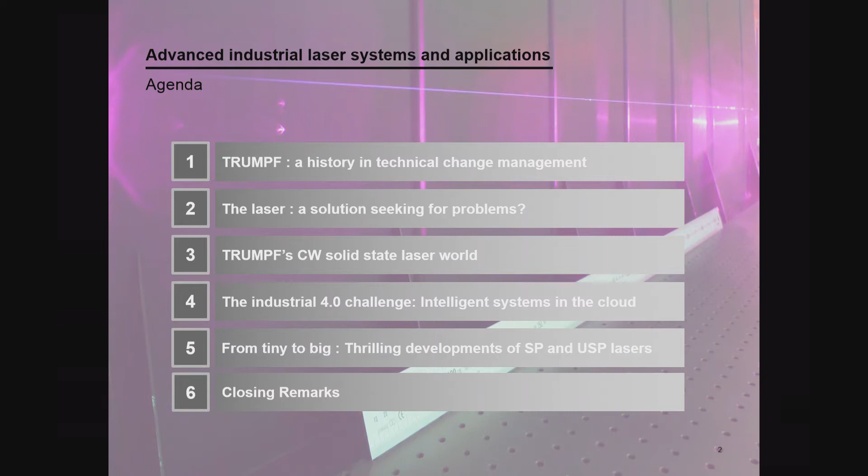As already said, I'm going to talk about advanced industrial laser systems and applications, mainly from the viewpoint of TRUMPF. I structured my talk as follows: I'll give a little history and some actuals on TRUMPF, then talk about applications in industry starting with CW related applications, making a step towards solid state CW lasers. We'll then talk about our challenge of mastering industrial 4.0 and the expectations our customers have of us and our answers to that. In the last part, I'll talk about short pulse and ultra short pulse lasers - though our ultra short pulse lasers are never as short pulsed as Urzi's lasers, so bear with me - and then I'll close with some remarks.

TRUMPF is clearly, as you know, a private family owned business. The company was founded in 1923. It more or less came out of a machine shop and then evolved slowly into one of the biggest privately owned machine tool companies in the world.

It's today split into mainly two divisions: a machine tool business and a laser business. The laser business takes revenue-wise around 30% today, and we are spread over 73 subsidiaries worldwide.

One thing that is driving this company and always fascinated me, even before I joined TRUMPF, is this continuous drive to new innovations. That has poisoned the company, I think, since its beginning, mainly also driven through Berthold Leibinger. I thought I'd sneak in some financial data here, presented on a log scale - you see the revenue development from the TRUMPF organization since 1949.

Obviously it's easier to grow your company on a log scale - it's still in the millions and in the billions. TRUMPF has put a lot of effort into growing their organization over the decades with new technologies. Surprisingly, already in 1979, TRUMPF introduced a system that was a punching machine together with a laser cutting head, by that time with 500 watts.

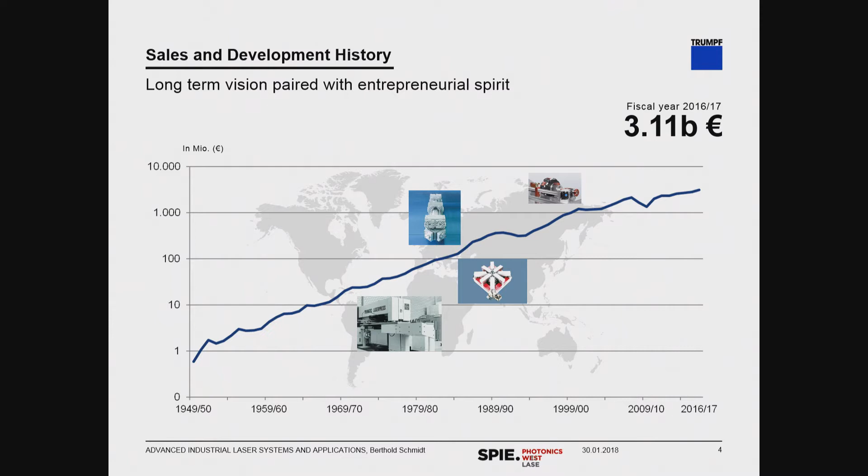Now today, TRUMPF is naturally investing heavily. I think Peter Leibinger mentioned this morning we're investing around $400 million in R&D every year, or at least last year, into new technologies such as fiber laser activities, additive manufacturing, as you saw in the introduction, and also AXOOM, a software-based system organization supporting the industrial 4.0 activity of our customers, and also the EUV business.

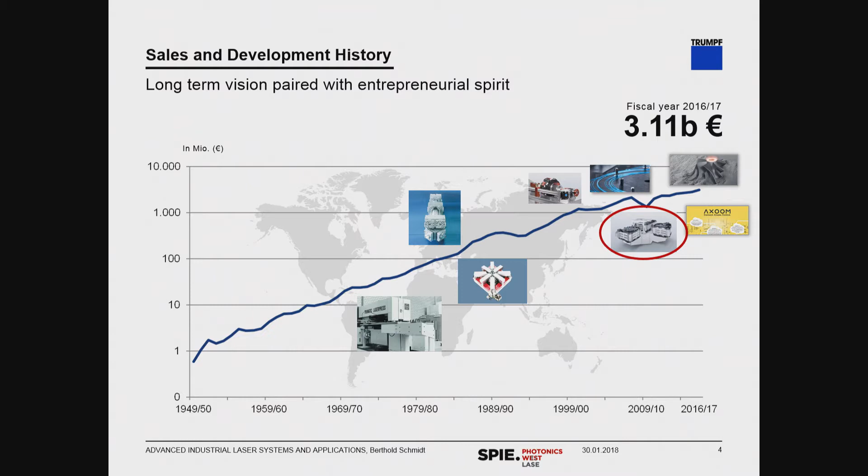I think the EUV activity is a good starting point for my talk, because it gives another nice example of the entrepreneurial spirit of the TRUMPF organization. This activity was started 10 to 12 years ago, mainly inspired by Peter Leibinger, who supported it very heavily. The idea is to use a CO2-powered lithography system to generate the next generation of microchips with node sizes below the 7 to 9 nanometers we have today.

This is done in a fairly simple way - I'll skip the difficult equations. You use a CO2 laser. You hit a tin droplet in a chamber with the CO2 laser. When you hit it precisely and strong enough, it creates a plasma, and the plasma then, during the recombination process, emits light in the range of EUV 13.5 nanometers. You use the CO2 laser because the absorption coefficient in the plasma is proportional to lambda squared, so longer wavelengths actually help here.

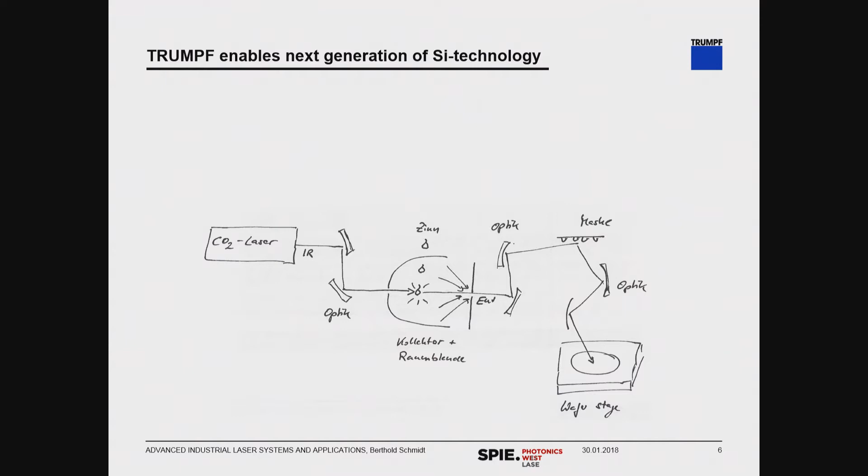You guide your EUV light through a set of optics and masks onto your semiconductor wafer. Naturally, the whole thing is a little more complex than shown here. The droplet generator that is used is already a technical challenge, creating 50,000 droplets per second, so we have to hit each droplet with a frequency of 50 kilohertz.

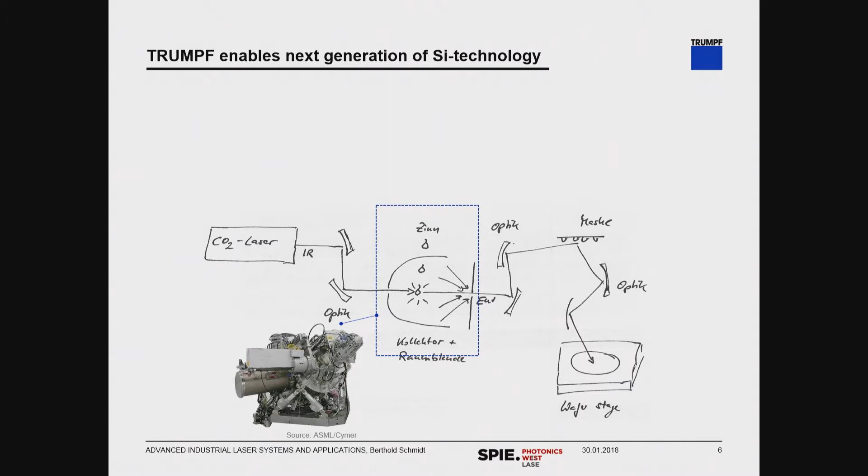Actually, we have to hit it twice: first there's a pre-pulse that creates a small mist of particles, and then a second pulse from our laser - which already has the size of a house - actually a diffraction-limited laser, creates this plasma. The lithography system, which normally stays in these fabs on top while our lasers are in the basement, has roughly the same size, guiding the EUV light onto the mask.

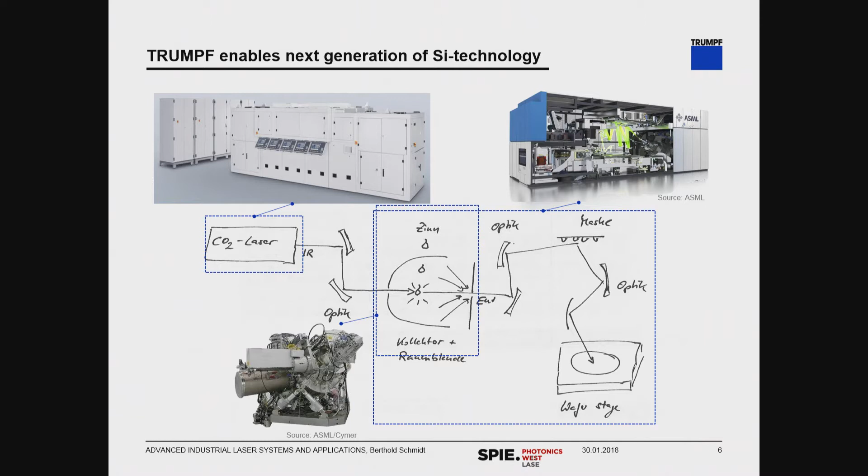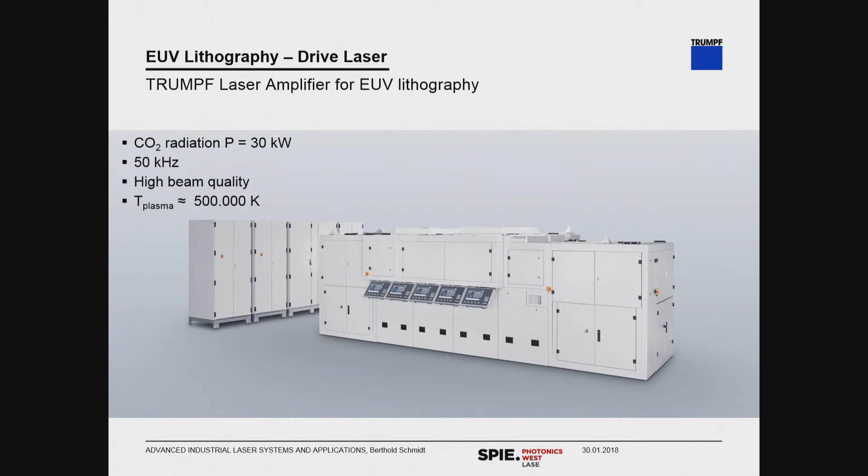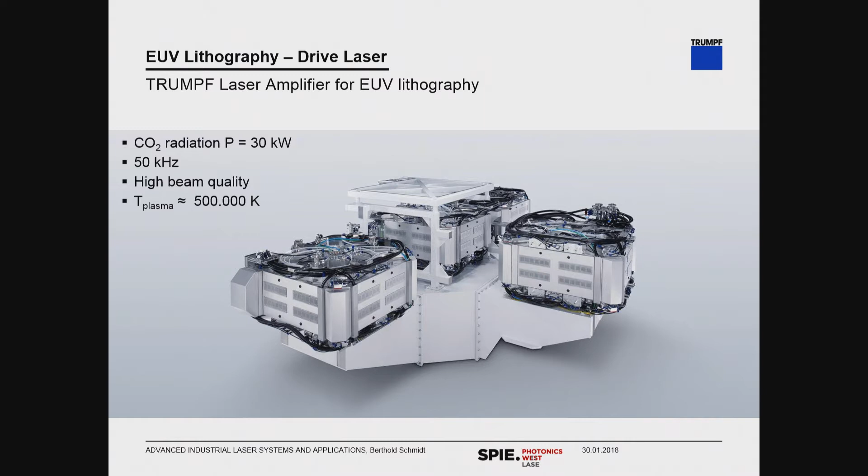Looking at the laser in more detail, it's a 30 kilowatt laser. It's a MOPA system, master oscillator power amplifier. We are creating a plasma temperature of around 500,000 degrees Kelvin. This is the 4-stage MOPA laser architecture. I think it's a very nice example of how, from a fundamental idea with continuous investment and growing with your partners, we evolved this from early stage development into a real product over the years.

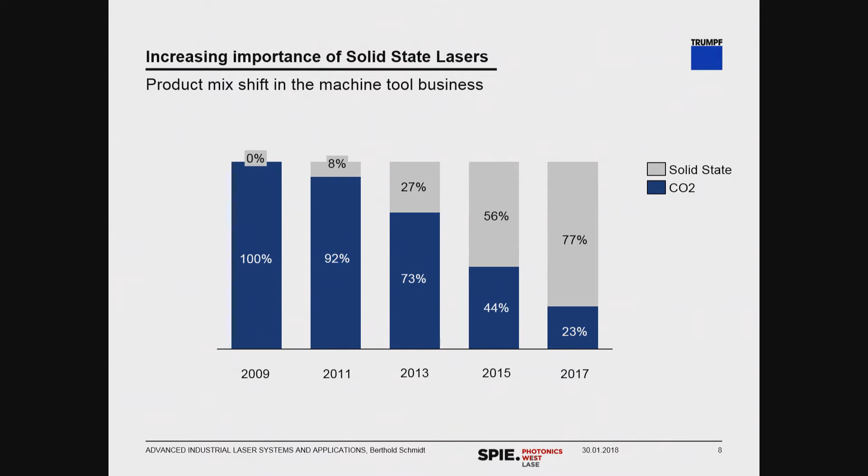Solid-state lasers for cutting at 1 micron naturally have the advantage that they are less sensitive to plasma absorption in welding, for instance. That's why they easily go through the plasma plume that normally sits above a metal workpiece. Therefore, CO2 lasers are great for EUV plasma generation, and solid-state lasers are better for welding and cutting purposes.

We approach this change with a whole bandwidth of technologies, shown here with our international entities. CO2 lasers are still manufactured very successfully in Ditzingen. Schramberg is doing the disc laser activities in Germany. We have a marking laser activity. The diodes and pumps are produced in Princeton Photonics - that's the area I'm active in right now.

We are supplying SPI in Southampton, which together with JK Laser we acquired. Then there is this group in TRUMPF Scientific in Munich, and then there is our Ingeneric group that provides us the micro-optics for that. We are more or less supplying out of our entity most of those activities.

And then there is still a little space - you might have heard that we just acquired another company in Aachen, Amphos, to complete our technology portfolio. You see, we're not picky on just one system, and I think that's a great acquisition, because on that we will have additional synergies for future laser systems.

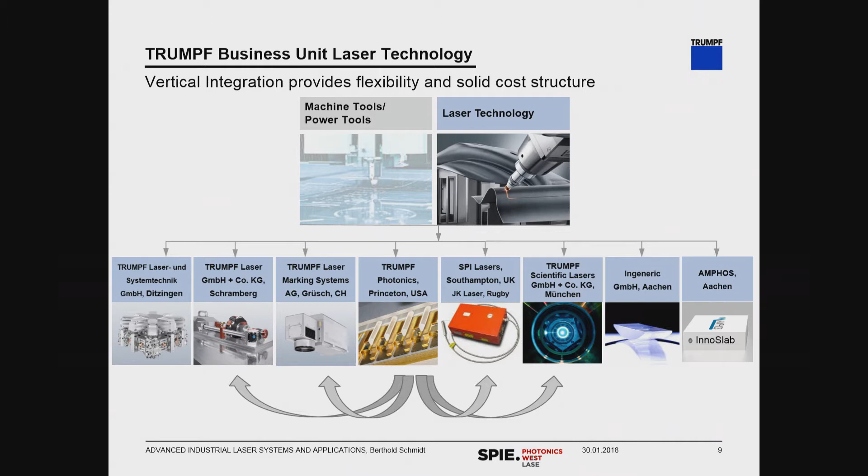So one slide on diodes. As you know, in Princeton we are continuing this vertical integration activity to be successful. We have various building blocks - here the pump system for our disc lasers, where the bar power went up over the years to 180 watts, and now in the latest disk laser architecture to more than 200 watts on the operation level.

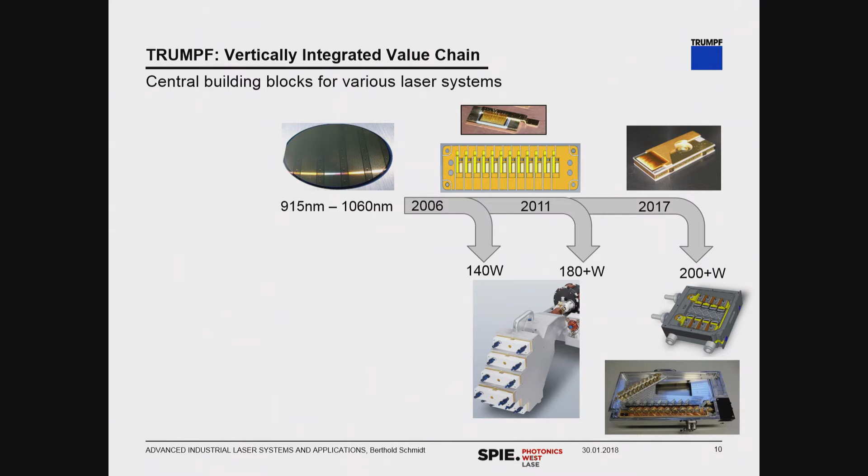We are using an isolated elastic cooler for those bars, and this is also a very handy tool because the same lasers, the same concept, we use for our research activities on the dense wavelength multiplex systems shown below. The same production line is also producing in higher and higher volumes single emitter and fiber pump modules. That's a 14 emitter module with 140 watt output power. It's already an industrial standard, and we supply this to our entities - SPI naturally, but also for marking laser activities and some short pulse fiber laser activities in Schramberg.

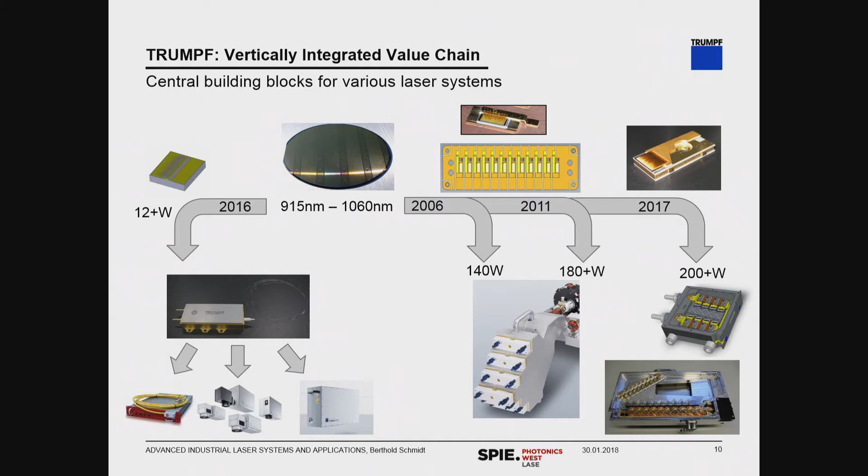Now, talking about applications on the laser side, I'll stick a little with the CW applications. Our customers expect that our system has very high flexibility. So with the same machine, we are able to cut this small bicycle with feature sizes in the micron and millimeter range. We are also cutting thick steel plates, and that's what our customers expect, because smaller companies have a whole variety of orders and challenges.

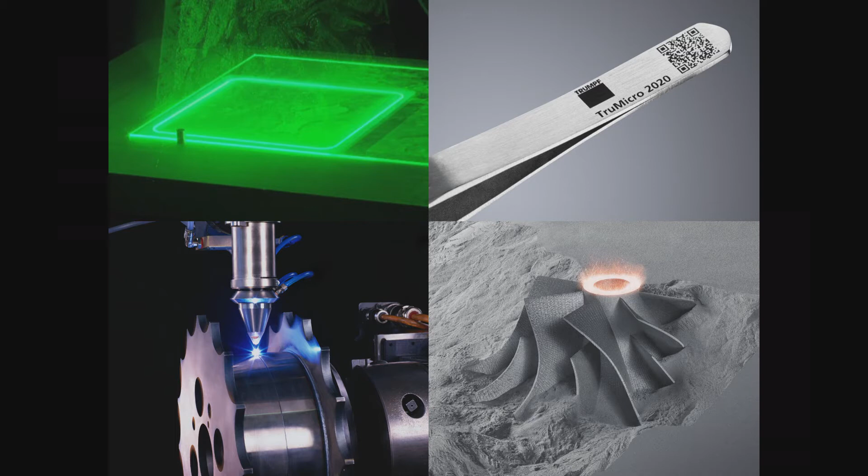Other applications we have include cutting of transparent material, marking, and laser additive manufacturing on one side - laser deposition, and laser melting out of a powder bed.

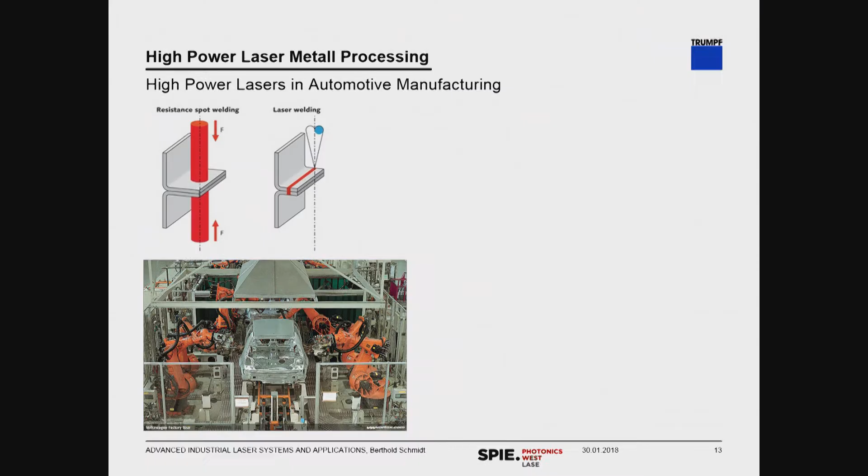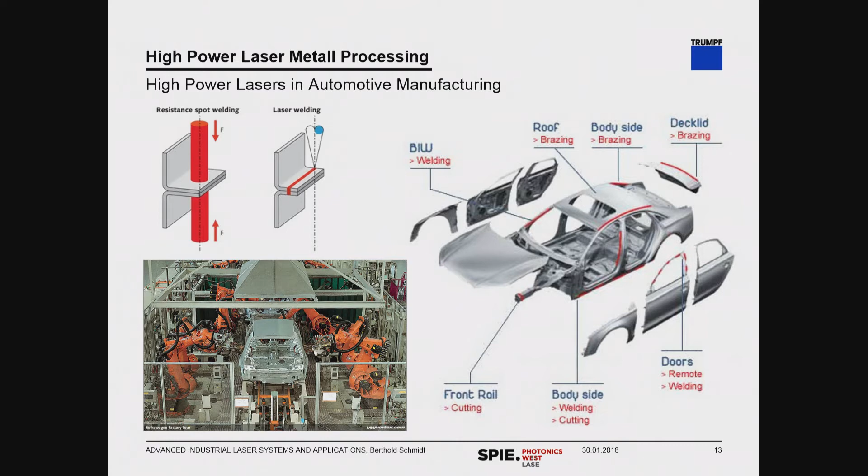When you start using a laser in your production line, you naturally also need to precisely cut in your other laser areas. So suddenly, it's like a domino effect - you start introducing lasers in multiple production steps, and therefore we saw an enormous increase in welding and cutting lasers during the past years in the industry.

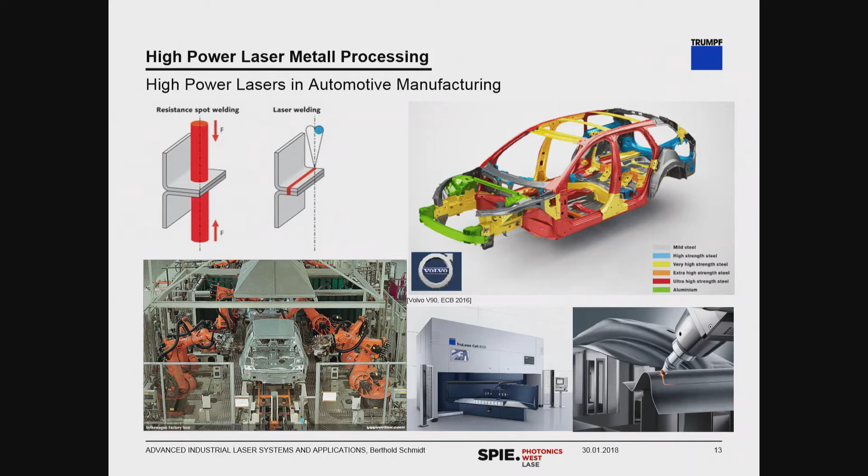When we span the use or utilization of lasers in a matrix, I think you have seen this in various forms already, so I won't stay here too long. The markets we have are remote welding and cutting - this is the biggest and most dominant market. There are other applications at lower brightness levels with a BPP that are still sufficient for conventional laser welding, but also for brazing and surface application.

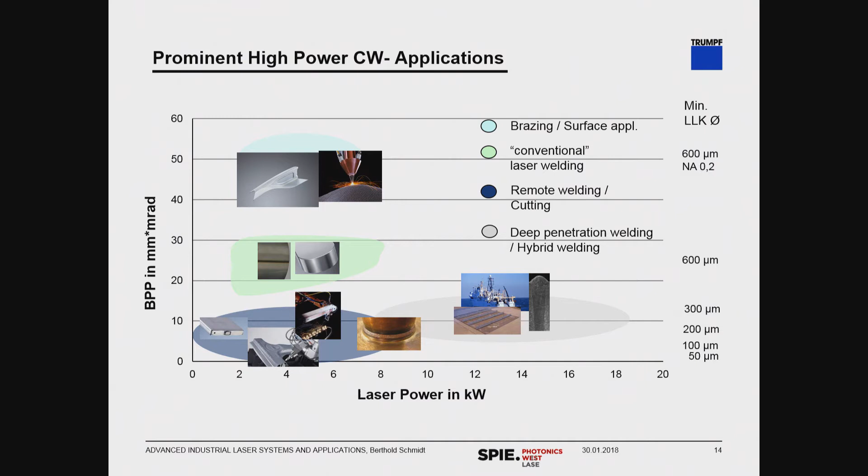With lasers beyond 12, 14, 16 kilowatt, you can do applications like deep penetration welding and hybrid welding.

To satisfy these expectations from our customers, we have a whole variety of different products we utilize for those purposes. Fundamentally, the technology is based on the platforms shown here, while the rod laser is not used anymore due to its disadvantage of having the heat profile and cooling and pumping in the same range, and therefore the heating up makes it not prominent anymore for high power laser systems.

Being a diode person, I know that improving a laser diode or its power level, you normally reduce the confinement factor, bring the internal losses down, and enlarge the footprint of the laser device to have better cooling.

You can do the same thing with a fiber laser and a disc laser - reduce doping concentration, enlarge mode size and diameter, and for fiber, for instance, just enlarge the length of the active fiber. On the disc laser, you're enlarging the ratio of surface to volume. That's why we use a thin disc laser.

I like the disc laser in particular as a diode person because it can be pumped with low brightness laser diodes, just in the range of 450 milliradians. So for semiconductor laser diodes, it's really like a flash lamp, and it's a great brightness converter, as you will see in a minute.

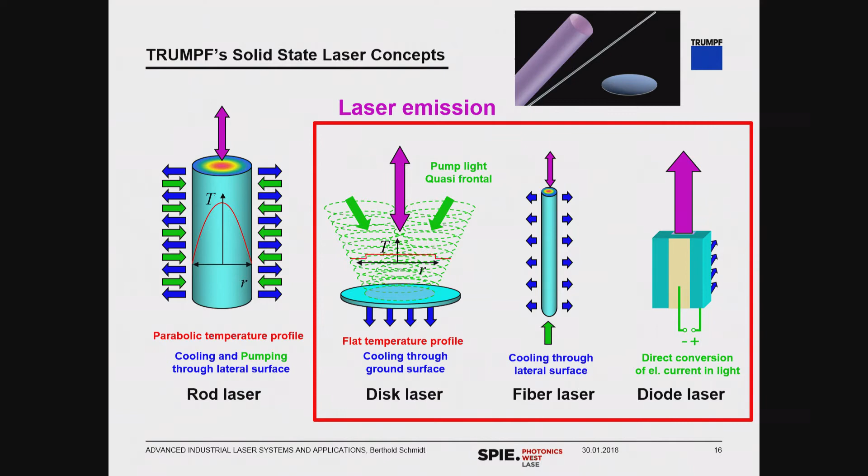So those are the technologies we are more or less selling to the market, and here's the matrix that fits the matrix you've seen before. Is there a better pointer? No, okay, it's not much brighter.

So the fiber laser activities you see here - we have today standard products up to 1 kilowatt high brightness. Then the disc lasers, these are coupled into 100 micron, going up to 12 kilowatt. These are folded disc lasers, so there are 2 disc lasers in the resonator.

Thank you, you're fantastic.

Then we have even higher power disc lasers. And here you see our conventional direct diode laser systems that range from brightness levels of 30 to 50 milliradians. And naturally, there is an activity going towards bringing those down.

But first, let us look at the single mode or single disc achievements we have already published. There was a very interesting paper 2 years ago from our team in Schramberg that showed an almost single mode disc at 4 kilowatt that was pumped with 969 nanometer into the zero phonon line.

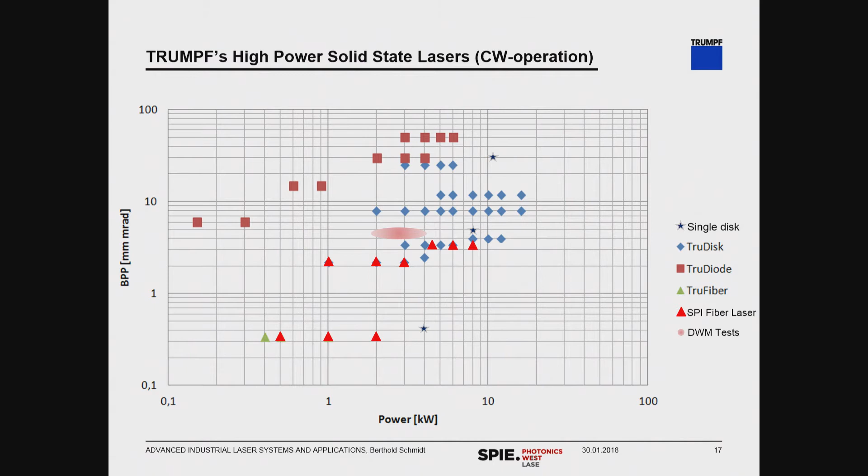We are showcasing there a 2 kilowatt dense wavelength multiplex laser. Those lasers are normally coupled into fibers of 150 to 200 micron. It's still in the engineering phase, but I'm very positive that will be an interesting add-on to support the laser portfolio we are already cultivating.

Disc lasers, I want to stick with that a little because in particular they're important for our short pulse activities. They have this beautiful property that they have these thin discs glued on a diamond, and therefore we have this uniaxial heat flow giving us very low thermal lensing for high brightness, even at very high output power levels.

I already mentioned the low brightness constraints of the laser diodes. The laser operates at very high gain saturation. So when you have a CW laser at 6 kilowatt, the output coupler has a reflectivity of 97% in that range, which means there are 194 kilowatts stored in the cavity. This makes the disc laser very insensitive to back reflections, thus being a very robust industrial laser for cutting all types of steel and materials.

And the negligible nonlinearities are in particular helpful for achieving very high peak powers, as you will see in just a few minutes.

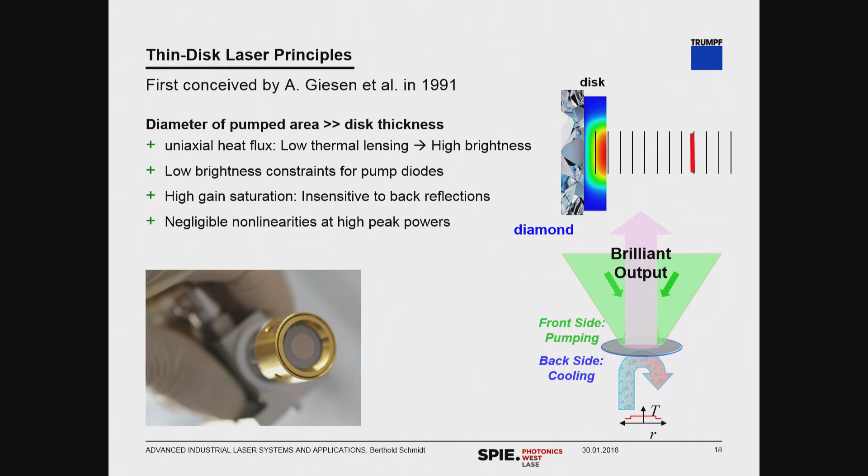So this is our last generation of disc laser we are now bringing to the market. The team has enormously improved the system. We are achieving now an optical to optical efficiency in the range of 71%. You see here the result with around 11 kilowatts out of a disc. This laser allows us also to achieve disc laser systems that almost reach 40% in wall plug efficiency, which is, I think, a tremendous step forward for this technology.

So you see here, it's more or less the pump light, which enters here through this window, and here is the active disk. It dances around between those prisms and the parabolic mirror until it's getting fully absorbed in the disk, and then we are generating the laser beam out of the disk laser unit into the resonator.

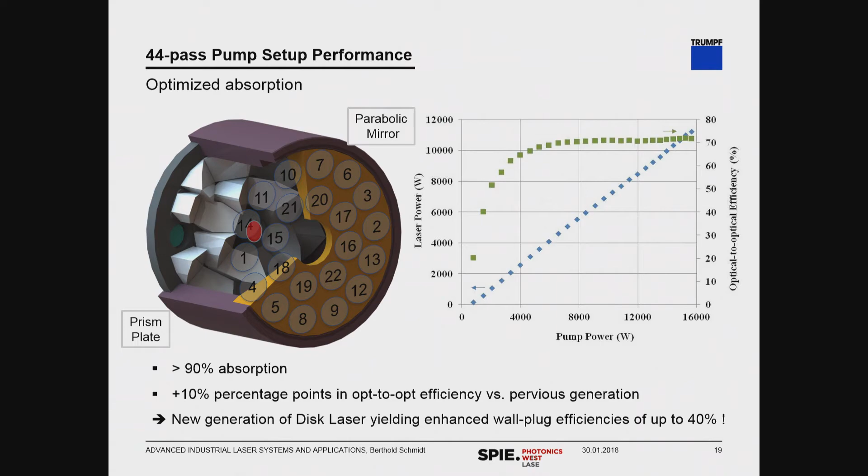In comparison to direct diode lasers, you see the footprint is fairly similar, and I use the old format, which is still our biggest volume product on the disk laser side, because you see here the pump units with the semiconductor bars included, and our direct diode lasers, which have this higher BPP, so 30 to 50 milliradian, are on the same platform, which is important in driving these volumes and bringing the cost down for our customers.

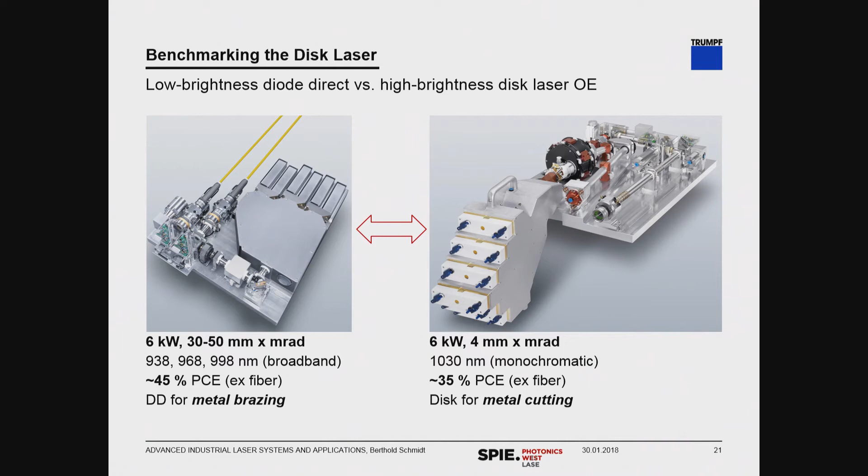So you see here direct diode laser with 45% power conversion efficiency as compared to the previous generation of disk lasers. And to give you an idea, those direct diode lasers are created by wavelength beam combining here, 3 wavelengths, then spatial beam combining, and naturally coarse wavelength or polarization beam combining to combine 2 of those modules. And with that we achieve 6 kilowatt out of the system.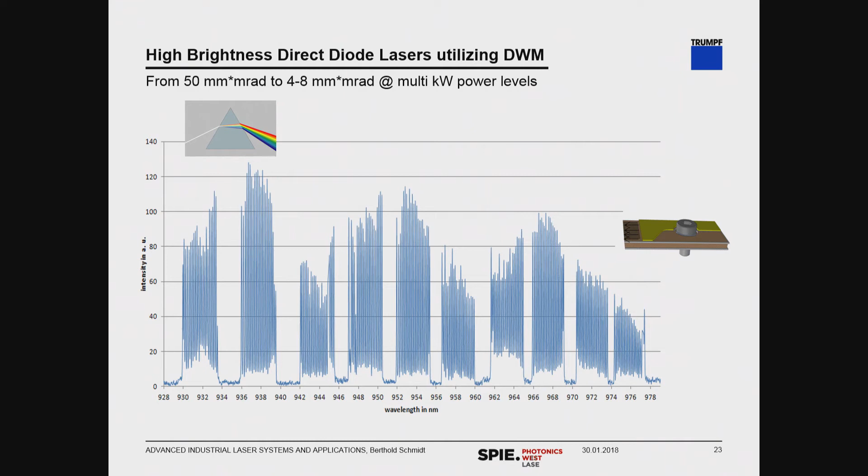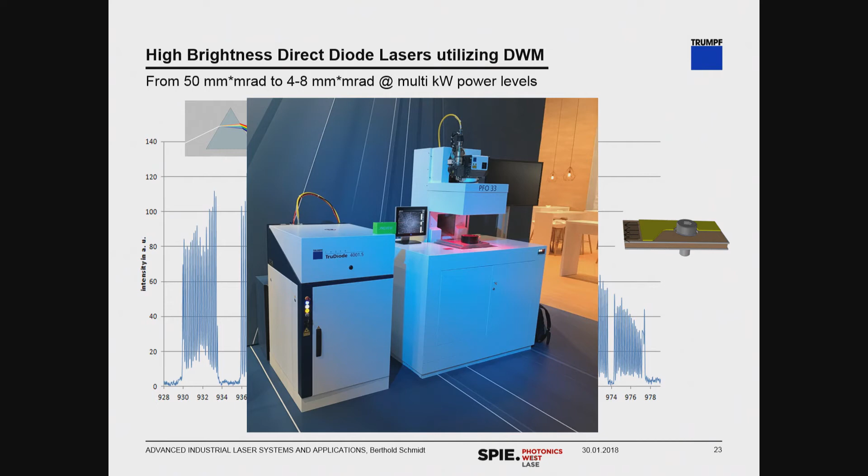And we showcased one system at the laser show in Munich. This was a 4 kilowatt laser, and outside there's another one at 2 kilowatt we have at our booth. We can drive this forward because naturally the brightness of a dense wavelength multiplex laser depends really on the beam quality of the emission bar.

And there was an interesting paper from our group in Berlin showing a single mode bar with, I think, 200 emitters operating all at different wavelengths, and achieving in this lab experiment already 100 watt out of this bar with an M square that is already stabilized within a resonator with an M square of 2. So this should give us long term also the opportunity to couple direct diode lasers into 30 to 50 micron fiber diameters.

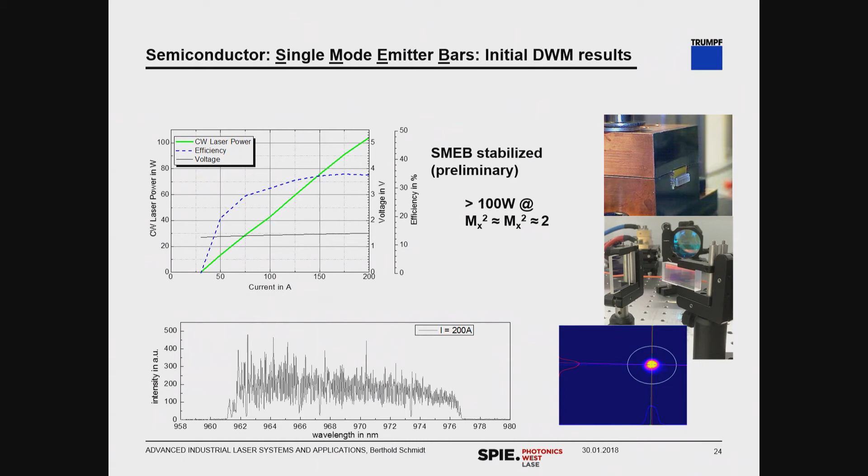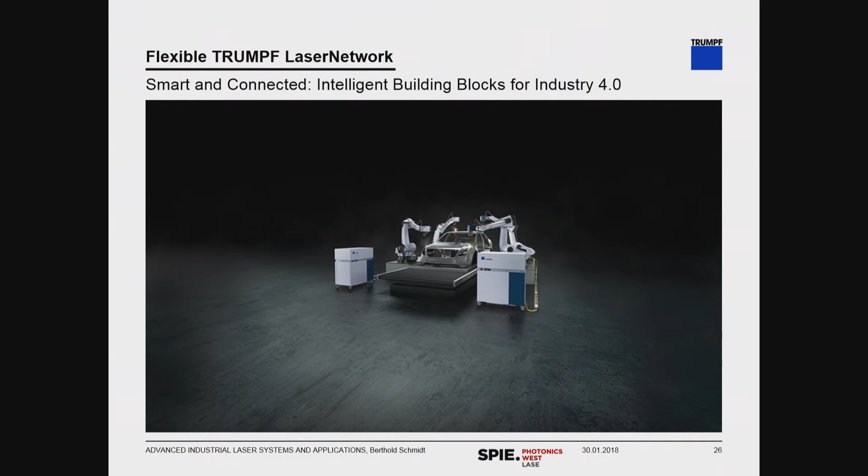So now let's talk about something completely different: the challenges we have with Industry 4.0. Our customers like the technical details. Our customers expect that we are going to stay on top of the technical development on the laser side, but on the other side, they also want to use this in their production environment. And that is very important because there's a lot of research going on to make those systems ready to be used in an Industry 4.0 environment, which means in general our customers want the systems to talk to each other.

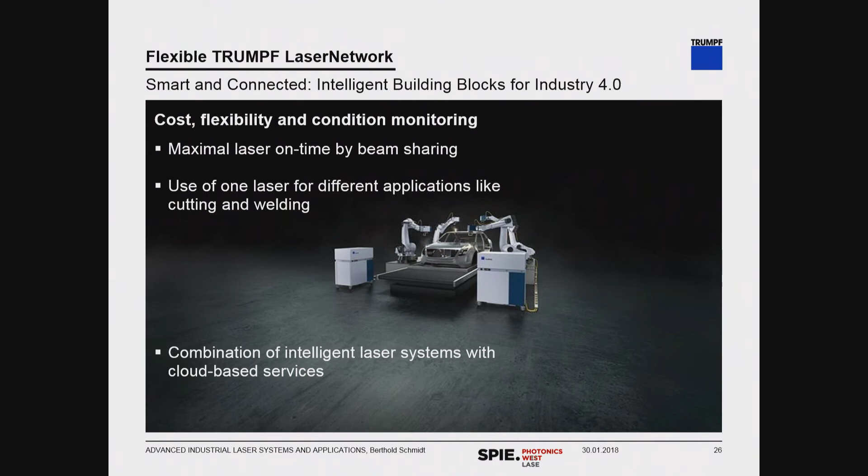They should have maximum flexibility. So you want to optimize the laser on time. You have switches, beam switches, power sharing in your systems, and this should be all controlled automatically. On top, you want to use your laser as a smart manufacturing tool. It's more or less that our lasers so far have a brain, so to say. If you keep in mind that we are generating something like 500 data points during a cutting or a welding process, it's very important to use this data to support our customers during their production cycle.

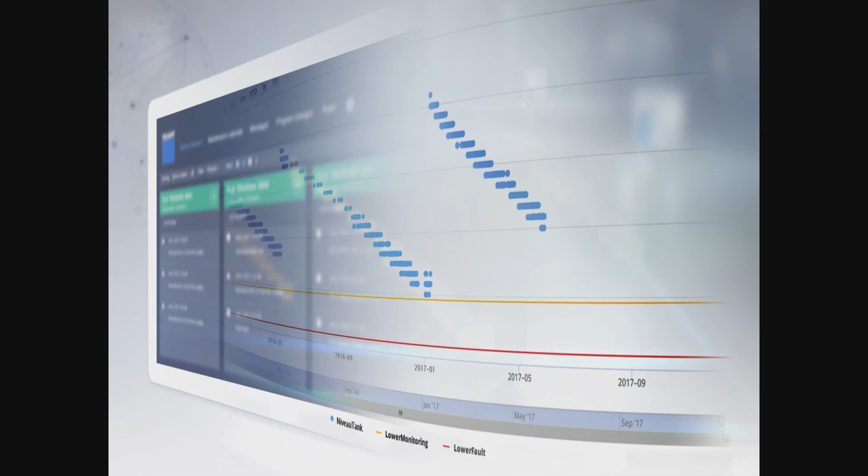So these lasers are then fully maintained. We have a software, we have an overview we're receiving into our systems. We look at the program changes our customers are doing, and we call them if we see that the lasers have a fluctuation or maybe a lens getting contaminated, and all the data is naturally transferred over a secure network. That's why we have AXOOM, and then the data comes into our condition monitoring center, and we analyze the data, not the process data, because that belongs to the customer, but the condition data from the laser.

And when we see a fluctuation, or we see that predictive maintenance is required, we call the customer. Either he can do this on-site, or we go there directly to support the customer, which is important when you think that there are factories that have 20, 30 of our lasers operating simultaneously. Each laser is responsible for a particular process step. We have to assure that we have 100% on-time performance in those factories.

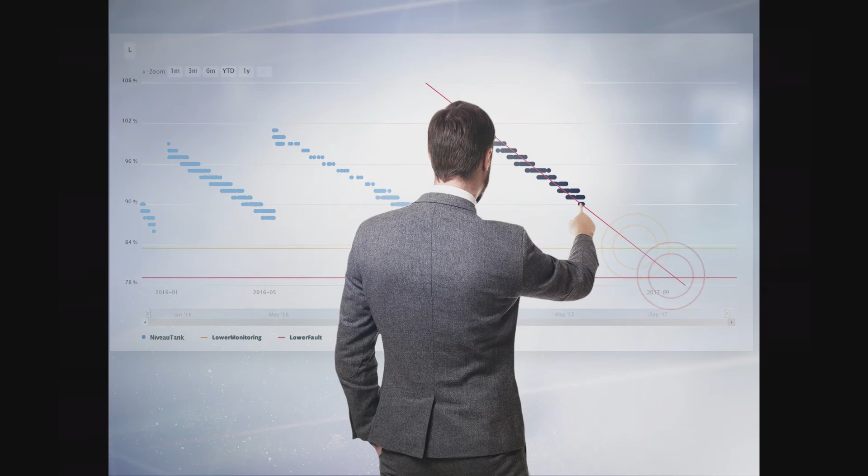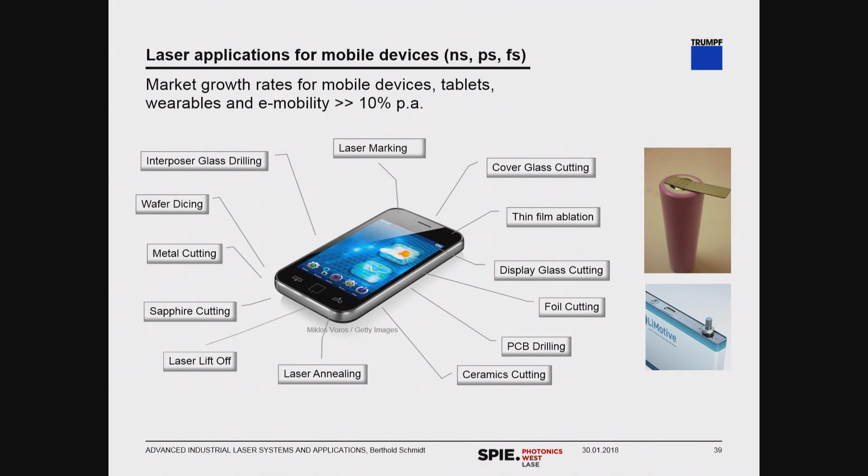And then on top, we see also the opportunities in the e-mobility market, where a lot of our lasers are utilized. All those markets are projected to grow in the next years at a rate of more than 10% per year. So I think that's really an important field for a company like TRUMPF to be present in.

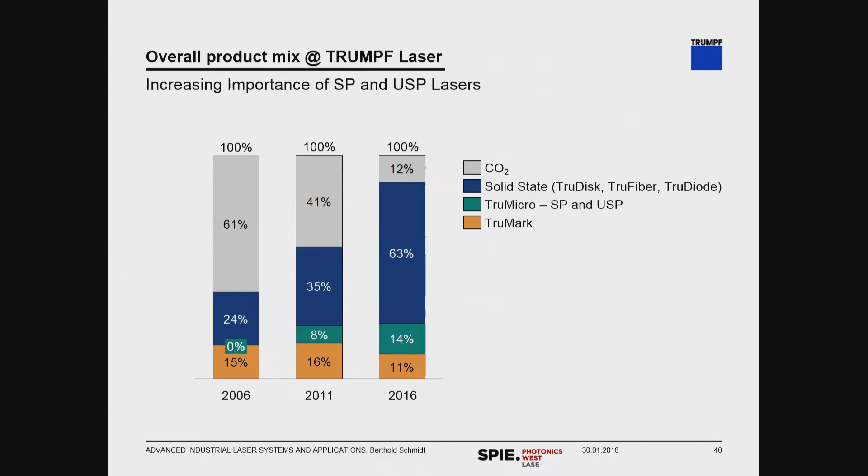To give you more details, this is now another revenue picture. This is again all the OEM lasers the TRUMPF organization is selling into the market, and you see how, since 2006, the number of TruMicro lasers increased dramatically, together with the overall increase in volume over the whole product portfolio. That's mainly for applications like marking, engraving, cold processing, ablation, and rapid thermal processing. We have distinct laser systems that do those types of jobs.

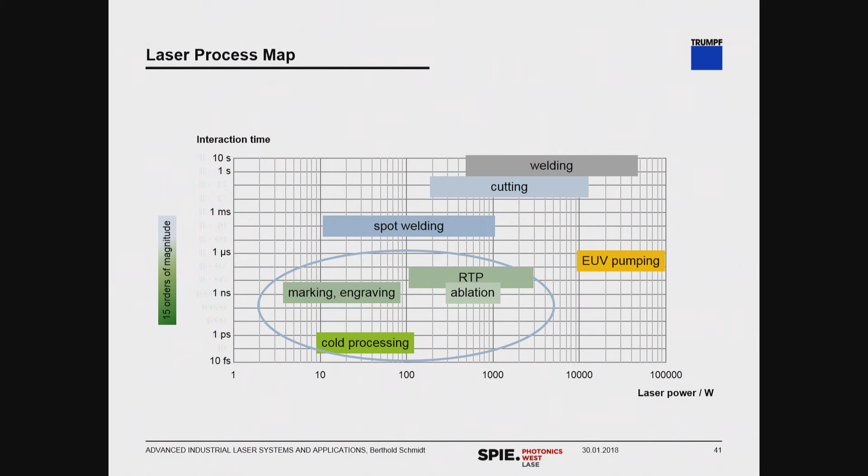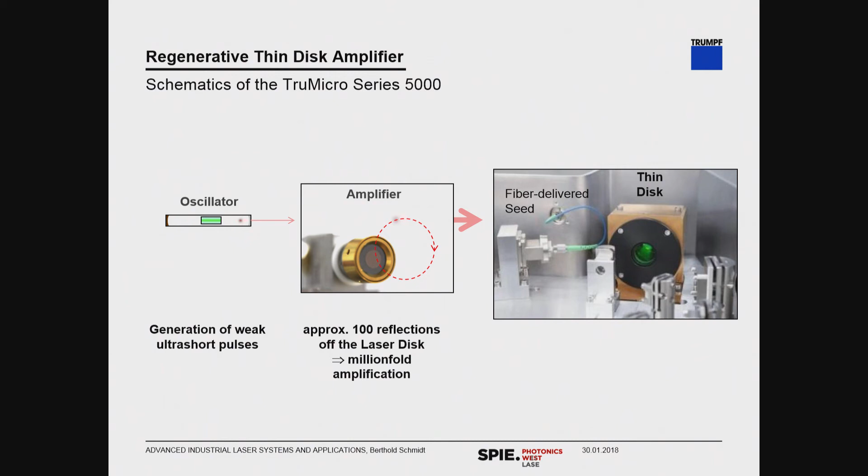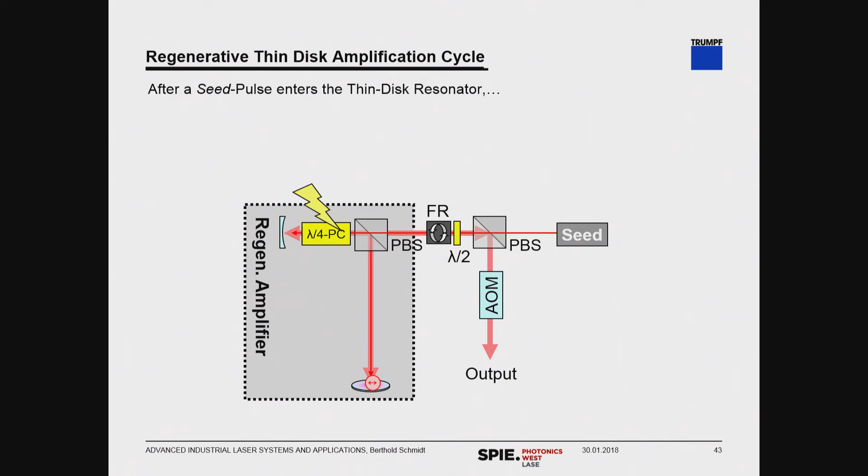So one laser is the regenerative thin disk amplifier. It's a fairly straightforward methodology how it works - I'll better explain it on the next slide. We have a seed laser coming from a fiber laser seed that enters the regenerative amplifier, and then it's locked in the amplifier because we switch the Pockels cells off, and in that moment the seed is getting amplified, entering through the disk around 100 times.

It increases in magnitude 5 or 6 times the order of magnitude, and then when we have this power, we turn the Pockels cell on again, and it goes through directly onto the workpiece.

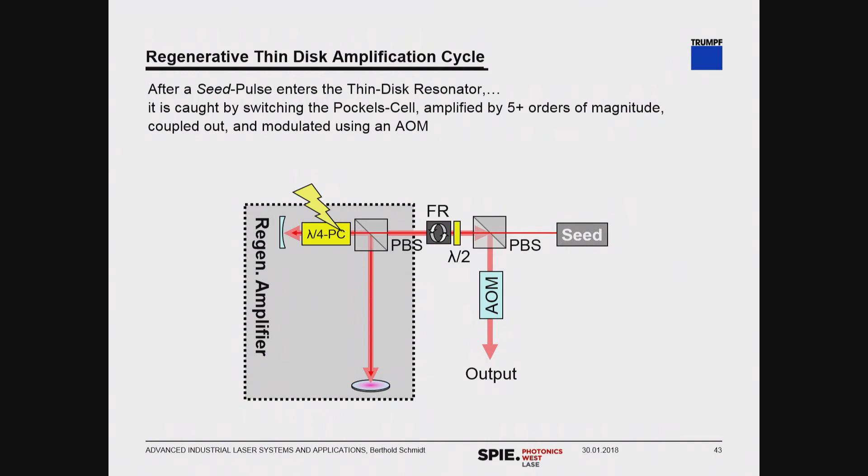So these laser systems, the regenerative amplifier systems, are picosecond lasers. They have a power level of 150 watts in the infrared. You can also have them with second harmonic generation, and when we throw in chirped pulse amplification, they go in terms of pulse length into the sub-picosecond range of 900 to 700 femtoseconds.

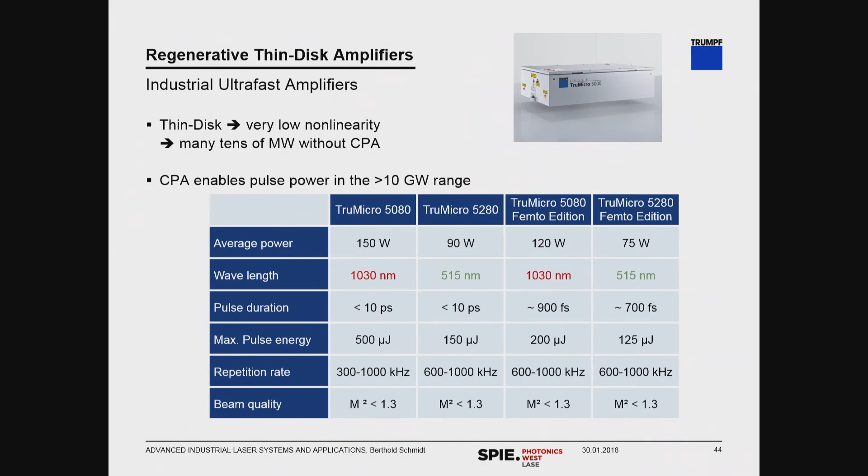The application of those is mainly for cutting and working with transparent materials. We combine this - and this is another important example - with our TOP Cleave optics.

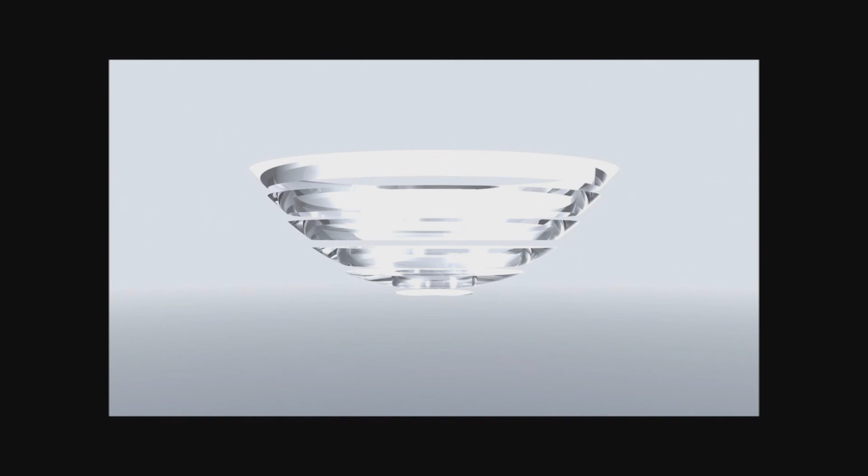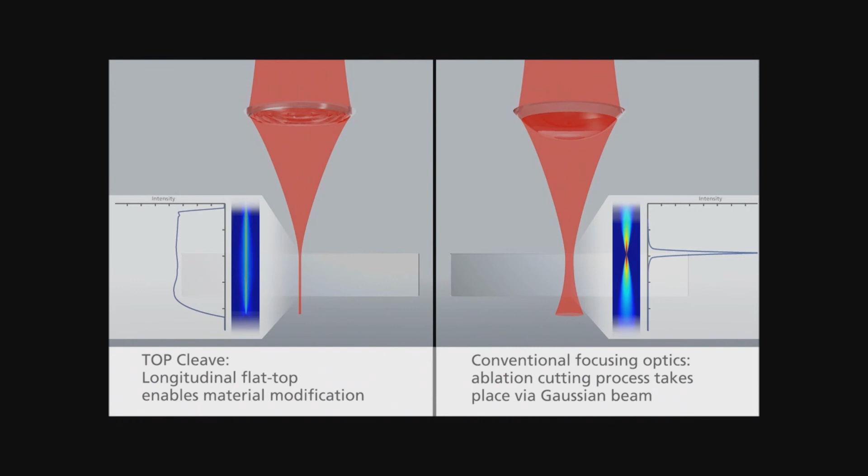Okay, so the TOP Cleave optics is in general a technology where we use a diffractive optical element to create a Bessel beam. This Bessel beam is then able - here we go - this is still using an ablative scanner cutting with a standard Gaussian beam. Now you see here the DOE, how it's formed, and this DOE with a focusing optic creates a fine Bessel beam that creates more or less a distortion in the material. When you move it with a picosecond laser through the material, this material modification creates more or less an additional strain in the Gorilla Glass, for instance.

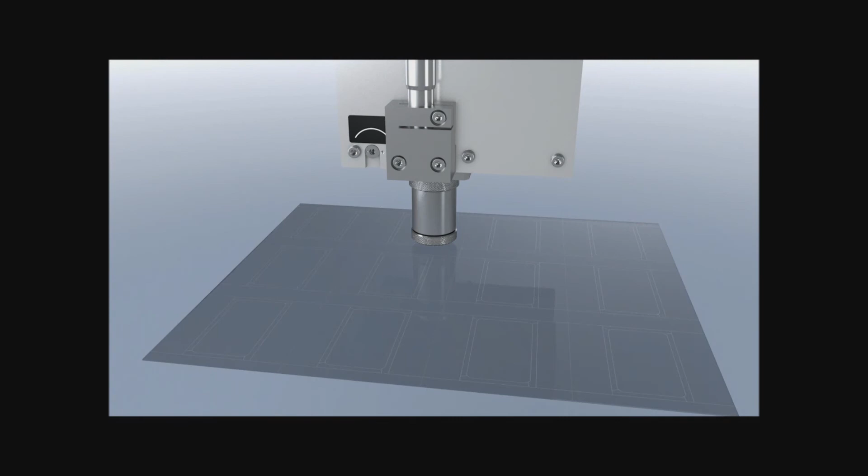And now you see it in real time here. It's actually a pretty fast process, and you just have to go through the material once. Then you put it there, you wait or you blow on it, and due to the chemical stress in the glass, you get your cover glass out without any burrs or additional particles. So it's actually a very nice process.

We are playing around, naturally, with those Bessel beams a lot. For instance, in the future, also to create chamfers on the side of the glass, and this is a different DOE we are using for that. And actually, all those technologies, I should mention, are also coming already with Kagome fibers as beam deliveries for those picosecond lasers.

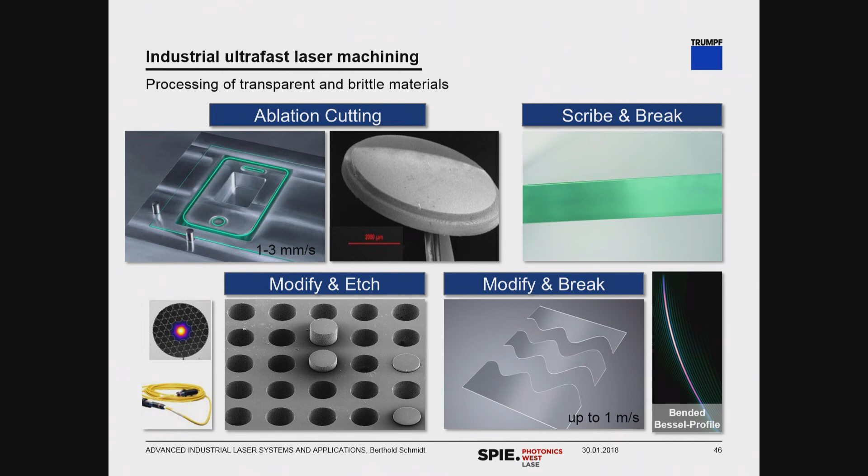Another family of our short pulse lasers are the nanosecond pulse lasers, and again we utilize the disc laser, the thin disc laser technology for that.

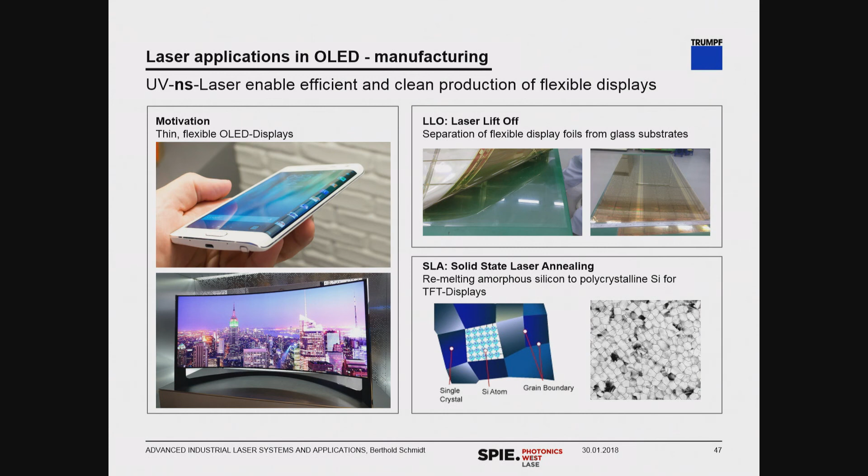The key applications are, on one side, laser liftoff, which is our predominant application for those technologies. Tomorrow's application with even higher powers from those nanosecond pulse lasers is solid state laser annealing, where you transform amorphous silicon into crystalline silicon. This lets you bring up the pixel size on your OLED displays without harming the rest of the material or having to heat it up, which is right now a predominant process for the excimer lasers in the market. So the technology for the liftoff is fairly simple.

Our lasers in the third harmonic generation have a wavelength of 343 nanometers. We go through the carrier glass and destroy the glue that is between the OLED and the carrier glass used for the whole production process. You see here the various generations of glass sizes already used in the industry. The UV line beam destroys this glue, and then you can slip off the OLED display after your production cycle.

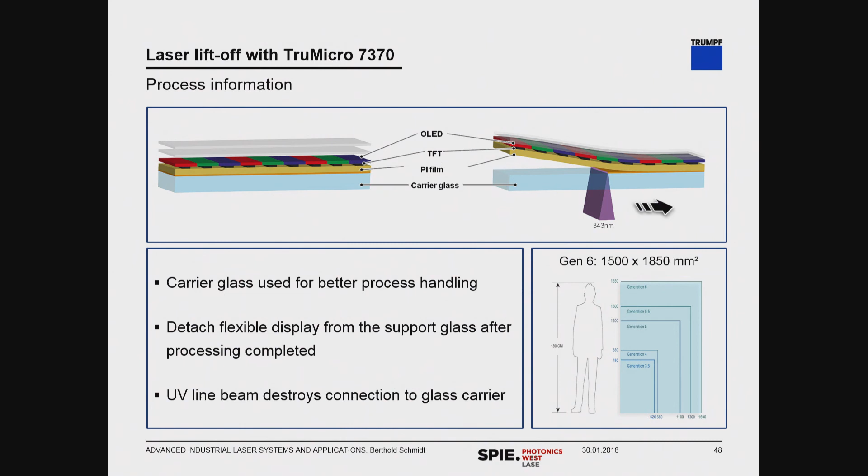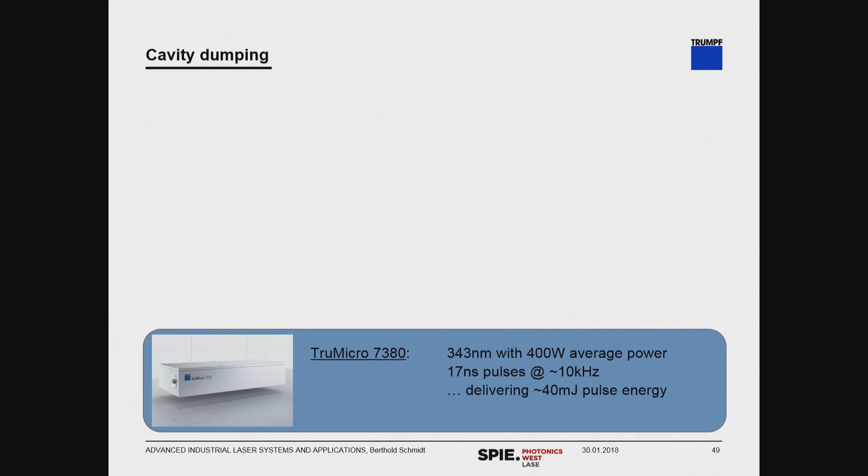For that we are using a cavity dumped laser technology, which is even simpler than a regenerative amplifier. It's essentially a laser where you lock the whole light in your cavity. You let the power in the resonator build up, and when the power level detected by this photodiode reaches a certain limit, you switch your Pockels cell and release your laser pulse. The laser pulse naturally has a length in terms of the round trip time of the resonator, so it's in the range of 17 to 20 nanoseconds.

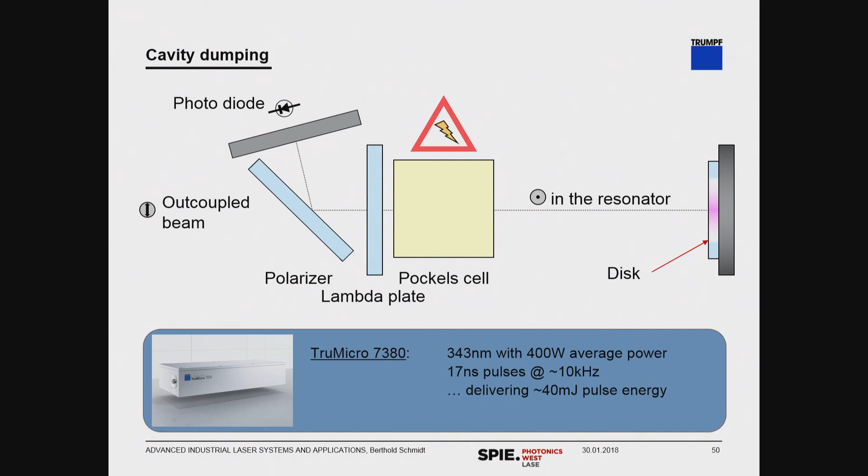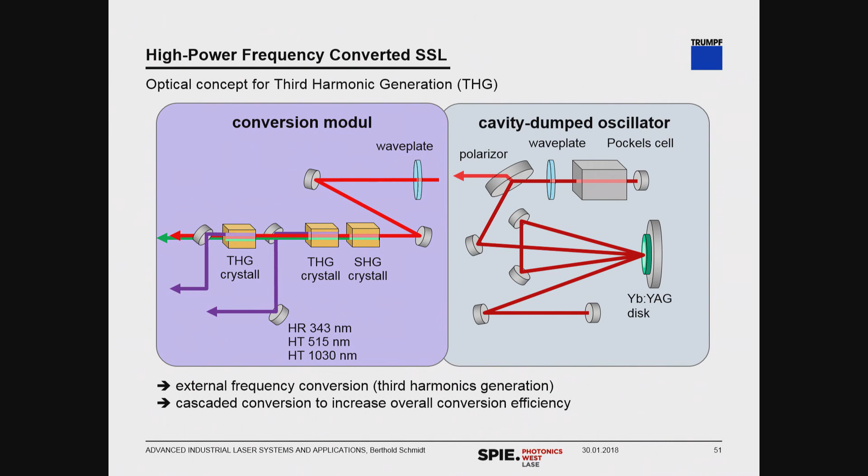And then you can cascade the frequency conversion with your crystals in two stages, to avoid having too high power densities in a single crystal. With these architectures, we are already achieving up to 400 to 500 watts out of a single laser.

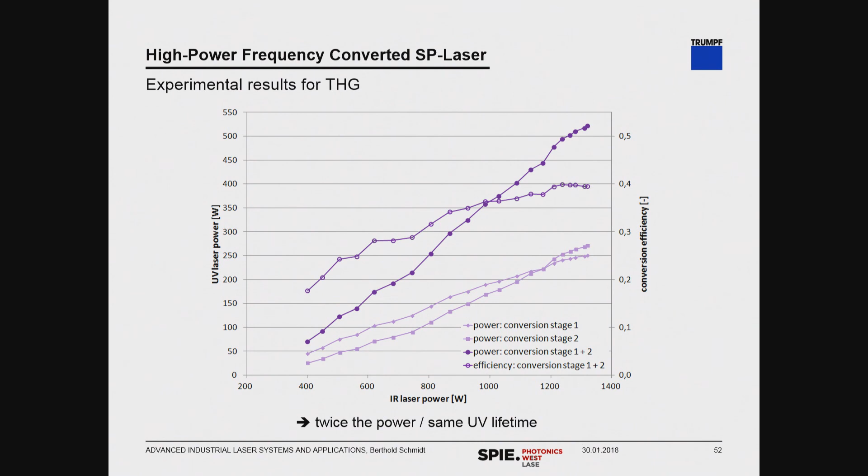Let's move toward the end of my talk. I want to give you a few ideas of our future concepts. One thing we are working on is enhancing the power level of our short pulse lasers by means of a multipass amplifier.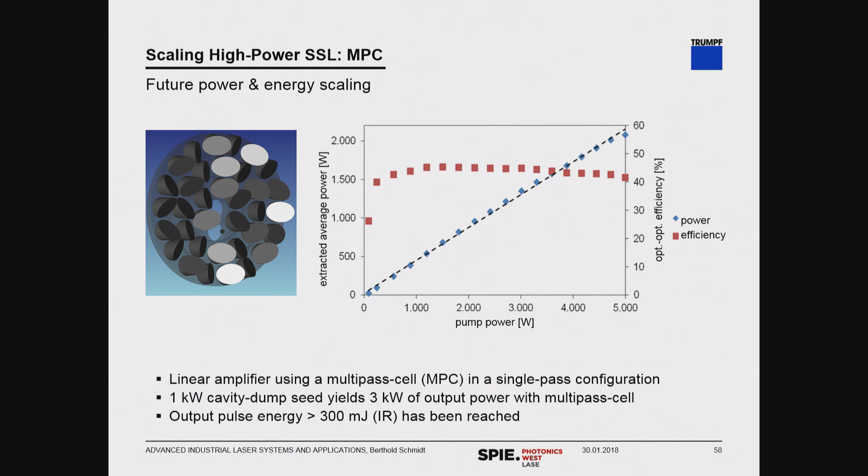For instance, with the nanosecond system I showed you before, we achieve 2 kilowatts out of the multipass cell, together with the cavity dump 1 kilowatt system. In infrared we already reached 3 kilowatts of nanosecond pulse laser output power. You can also apply this technology to a CW laser system. Here, together with a single disk 7 kilowatt disk laser, we get up to 20 kilowatts out of this laser system, which consists of just one single disk and the multipass cell.

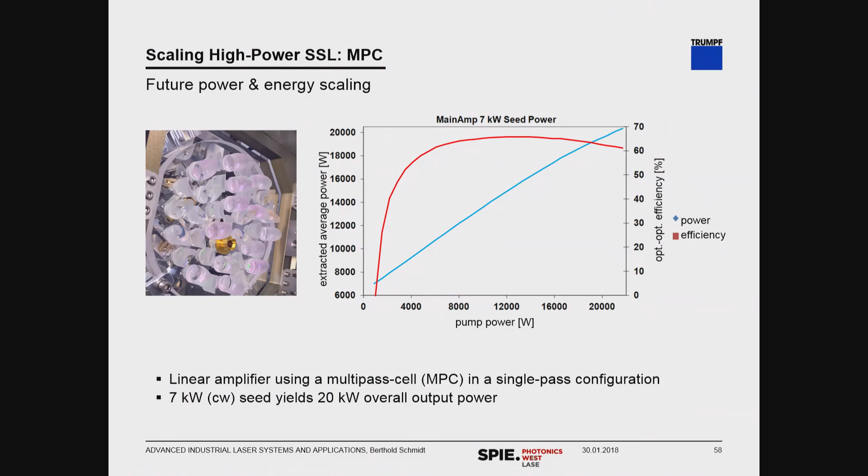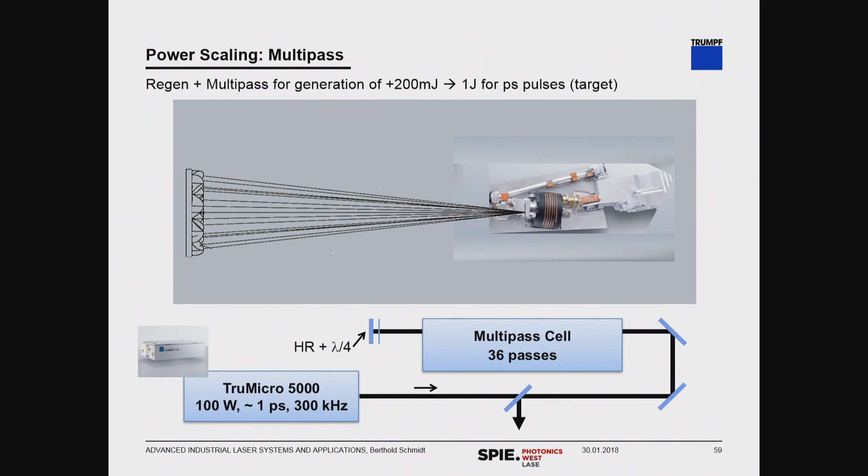We can also apply this technology to picosecond lasers. You see here the picosecond laser TruMicro 5000, and with a multipass cell we are planning, in a Euro-funded project, to go up to 1 joule pulse levels at picosecond scale, which is equivalent to roughly a terawatt of peak power in a picosecond.

So I'm going to end now with some closing remarks. I hope I was able to give you an understanding of why it's so crucial and important for us to support various technologies and platforms. You saw that new applications like laser liftoff at large scale or laser surface annealing are so important for us, and that's why we continue to drive our ultra-short pulse technology forward.

Long term, we see various platforms existing in parallel, because our customers always have slightly different needs and demands. And I think the laser development we see in industry, working with our partners at various institutes, has clearly not ended yet.

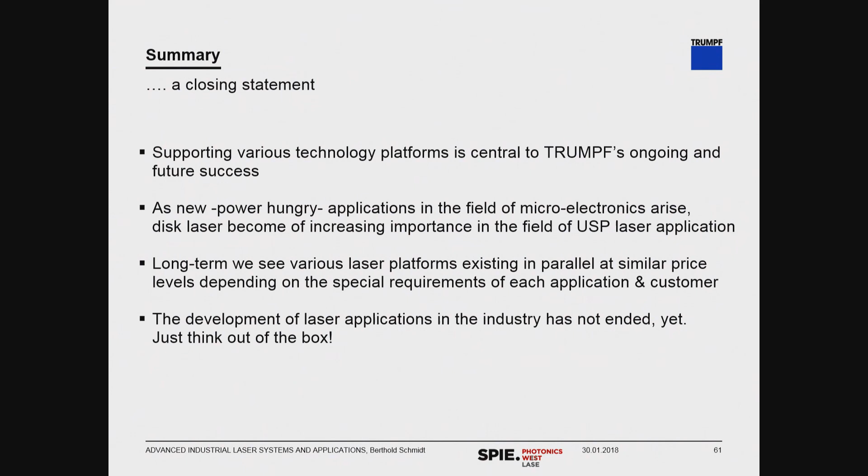Just as an example, going back to Switzerland, we are planning to install, on one of these projects, a laser based on the last architecture you've seen, on the Säntis. With this laser we create a kind of laser lightning rod: when you fire it, you create plasma filamentation in the air, and during a thunderstorm you can shoot down sparks and lightning. This is also interesting for protecting airports long term, for arriving and departing airplanes during a thunderstorm.